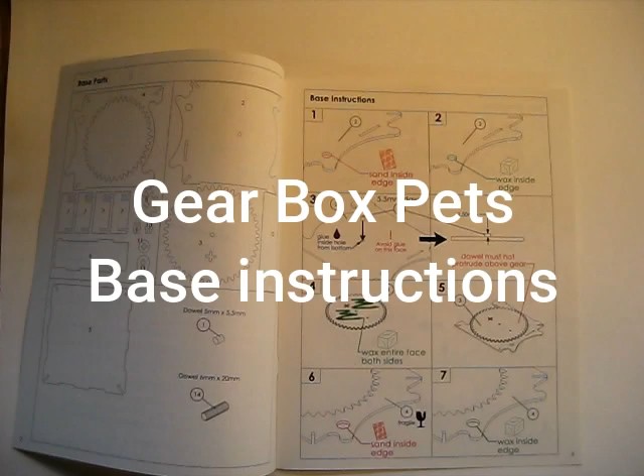These are the base instructions for the Gear Box Pets.

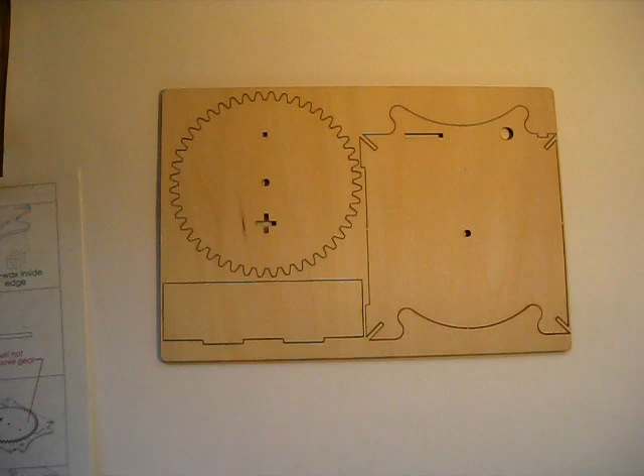Step 1, we're going to take part number 2 and sand the inside edge. You might like to use a scalpel like this just to help cut these tabs.

Just sand off those tabs, sand or cut, so they don't get in the way. Here's the sandpaper provided.

Now we're going to sand inside of this hole where our winding shaft will be. Just roll the sandpaper into a bit of a tube. Just give it a light sand.

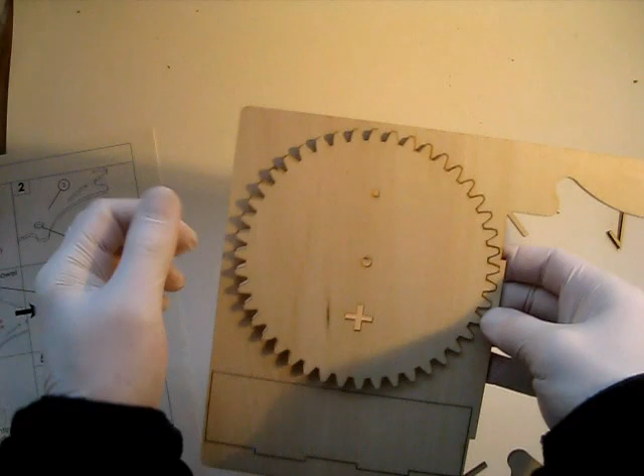Now we're going to take our gear number 3 and wax the faces both sides. Again, make sure the tabs are sanded off. Don't want tabs on the gear teeth because they can bind the mechanism.

Again, apply a lot of wax. Just rub it all over the face. Then flip it over and wax the other side. Give those teeth a bit of a wax too. So the wax acts as a lubricant, like oil, helps to reduce friction in the mechanisms.

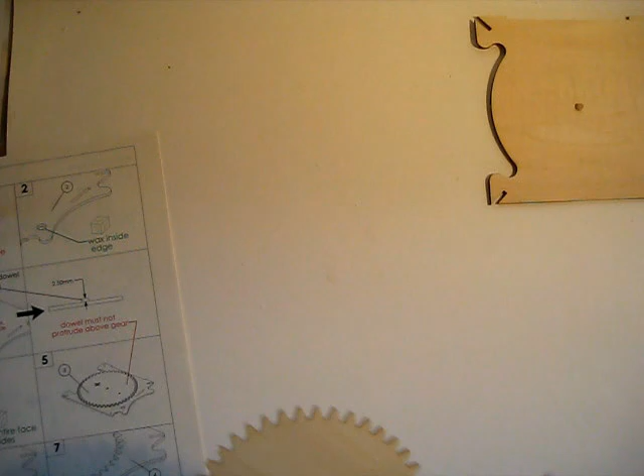Now we're going to place our gear.

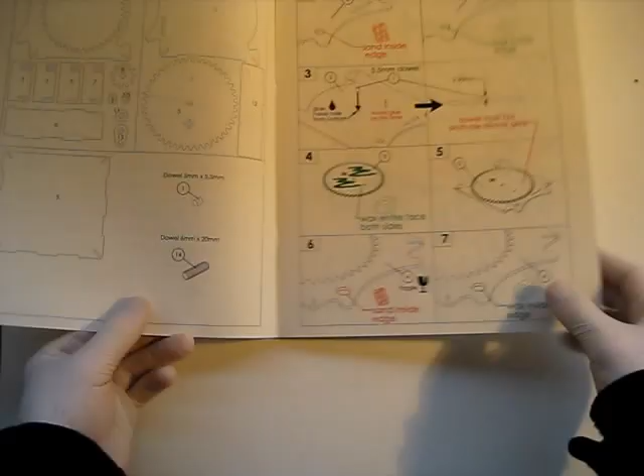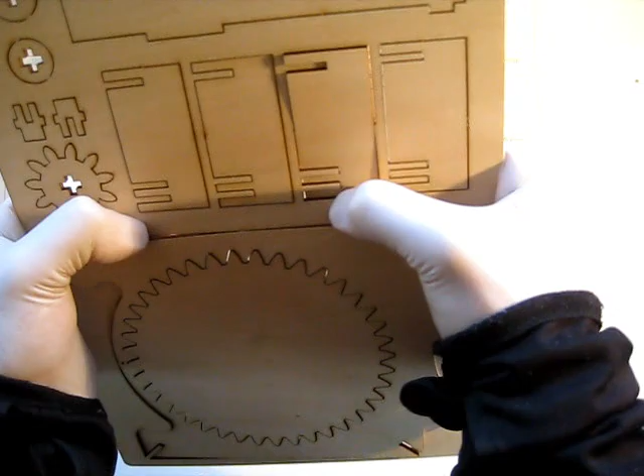Step 6, going to take part number 4. You might not need a scalpel to press out the parts, but if you do, then it can be helpful just to cut the tabs, and you can avoid any breakage. This is a bit of a delicate part here, so I might use the scalpel to avoid breaking it.

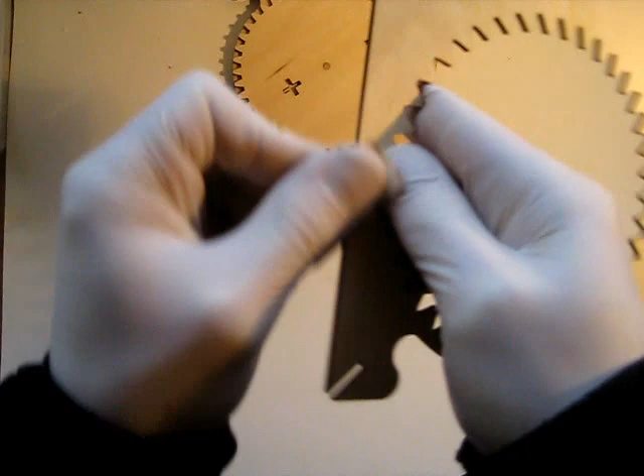And again, sand off any tabs, any areas that you think might catch on moving parts.

Right, so we're going to sand inside of this hole. Doesn't need too much. And we're going to wax inside that hole as well. This is again so our winding stick can move nice and freely.

And you're going to place this on top lightly for now. Make sure that this dowel isn't sticking up past this gear, that it's just below the surface. That way it won't collide with our other smaller gear later on.

Now take these parts, you'll need 4 of them, and as usual sand off any tabs. These are going to push on with the 2 slots.

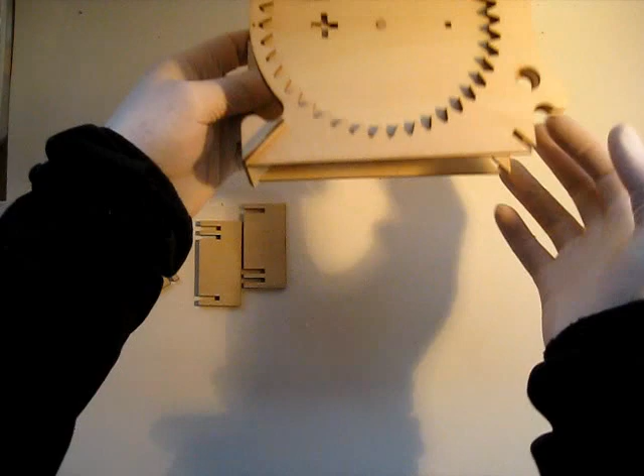And now align this base so that the unnotched side is towards you, and slide that on like so, and slide on the rest. Make sure they're all the way in.

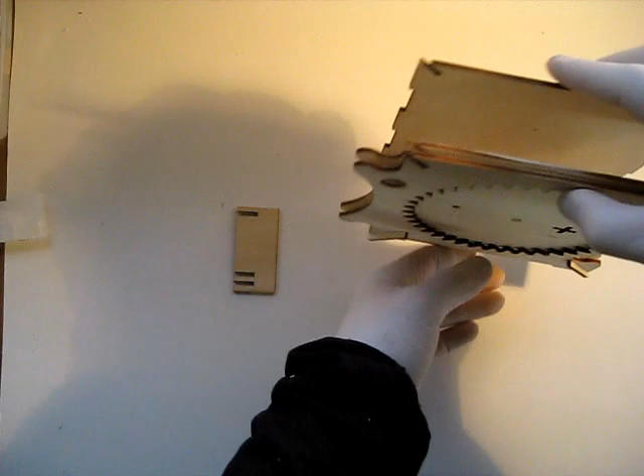And check that gear is moving freely. Okay, now we can take them off and glue them. Now we know we've got them all in the right spot with that unnotched edge on this side.

So you can just place your glue in that slot.

Now I have, and you should have, a jar of water with some brushes in it here. I like to use a larger brush and a smaller brush, and I use that to spread my glue. Just helps to get a bit more coverage.

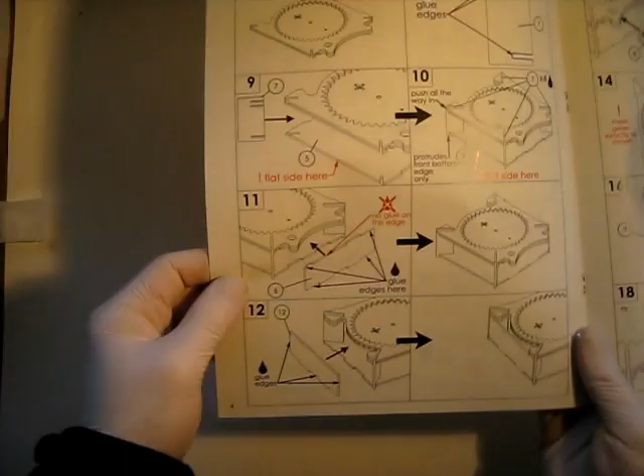Okay, step 11, we're going to find part number 6, glue the edges, no glue on the top edge, and that's going to slide into its location there on the side with the hole.

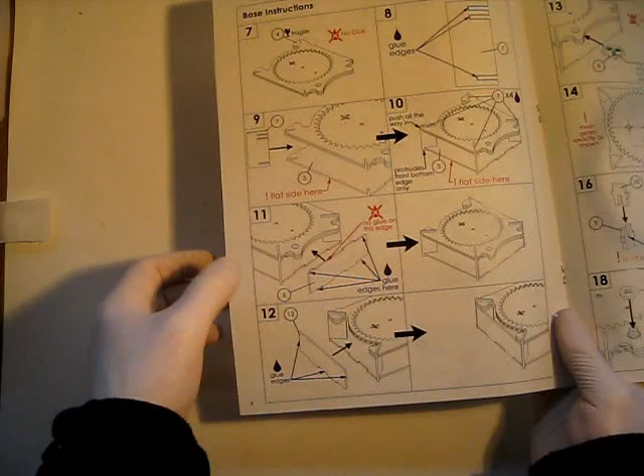Sand off any tabs as usual. So this will be glued into this position here.

Spread that glue out a bit. And you can push in this top tab first. And the bottom.

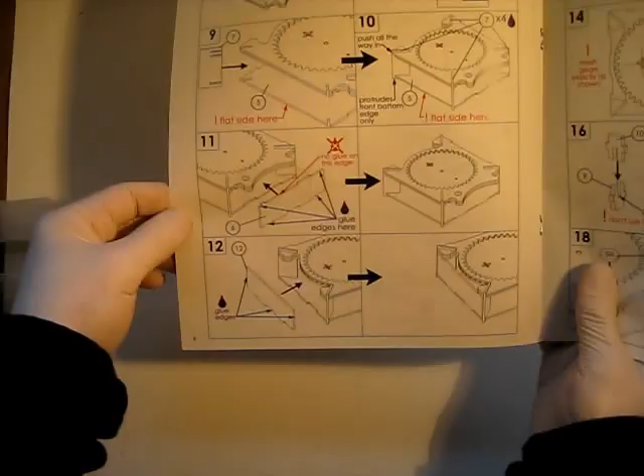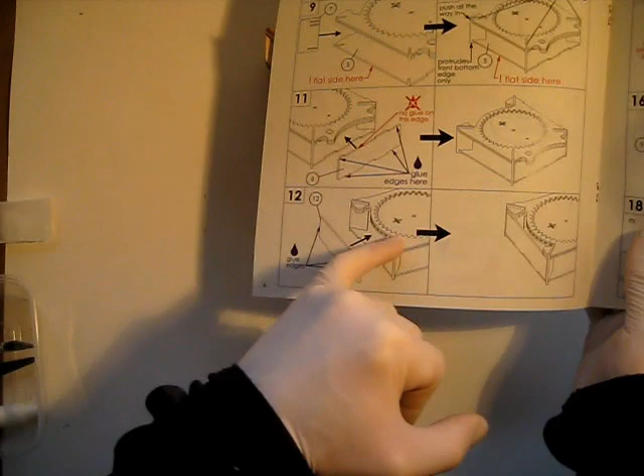So step 12, we're now going to put in piece 12 on the other side, the side with a little female puzzle piece notch. Sand off any tabs.

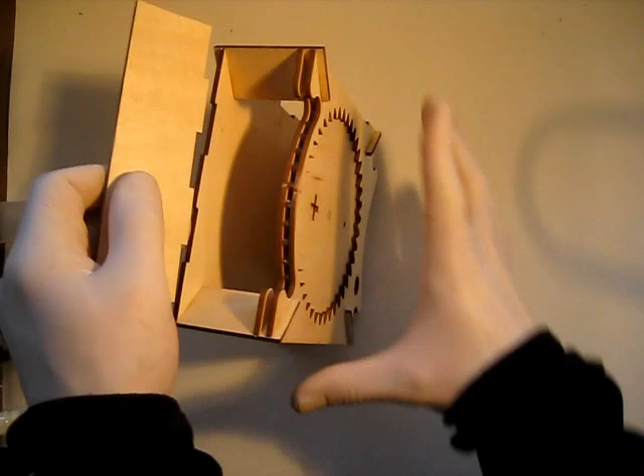So let's put some glue on that.

Spread that glue about. Put the glue here on the edge and a little bit on the face, just on those side parts, on those side edges. Tiny bit on the top, just on the ends. That's the inside face you want that glue, because it's going against these corner pieces.

And we'll use our wet brush to spread that glue about, let it wick into the cracks.

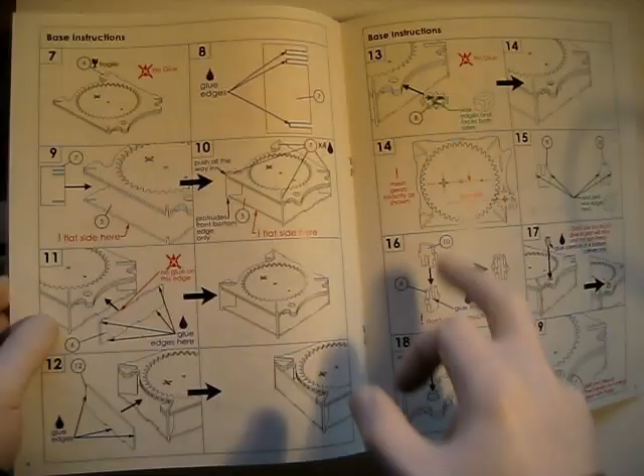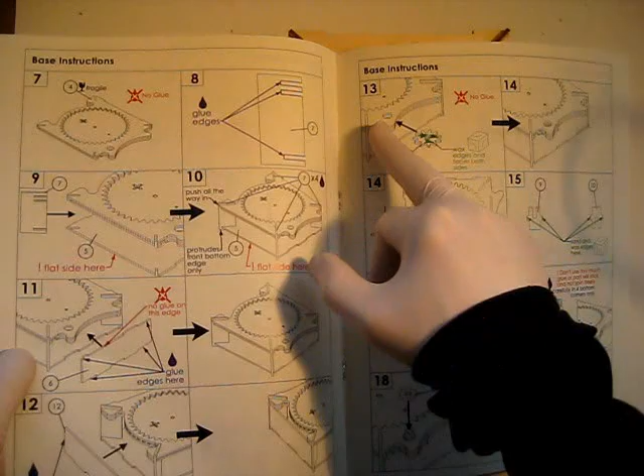Now we want to find the small gear, part number 8. We're not going to glue this piece, we're going to wax edges and faces both sides, and then we're going to slide it in to where the hole is.

It's especially important to make sure there's no tabs on gears, because then the gears will bind when they're moving. So, sand off the tabs, and now we're going to wax both sides.

One side, wax the other side, and wax the teeth.

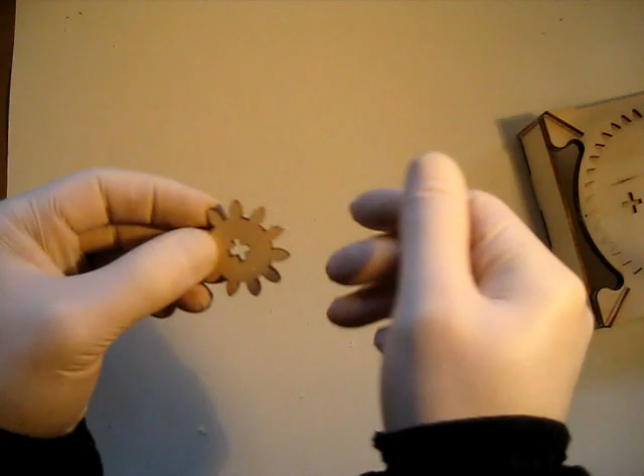And you can just blow away any excess wax. When we slide this gear in, we want to mesh it as shown in this picture here.

So we've got our cross to the left, lined up towards this dot, and then this gear is also making a cross, and we want to find where the cross matches some teeth. So this one, it's not quite lining up with the tooth, but this one, it is lining up with the tooth on the top. And then coming down, there's a gap. So this is our correct orientation.

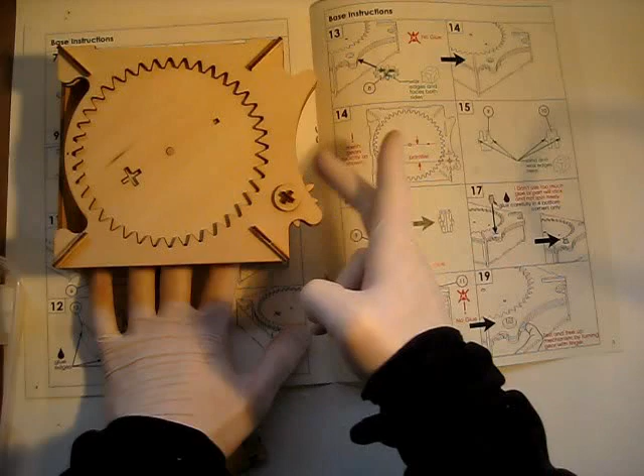And press that on. And now test and free up the mechanism by turning the gear with your finger. So don't hold on the top, hold down the bottom and give this a turn and check that it's nice and free.

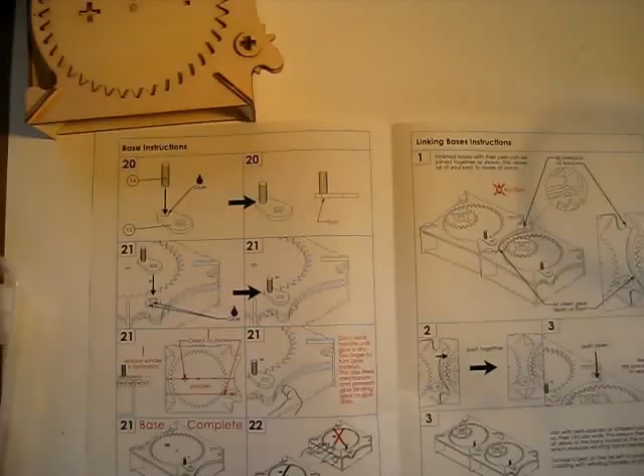And we'll finish with it back where we started, with the cross pointing towards this dot. Okay, so let's take part 13 and 14, which is the ribbed dowel.

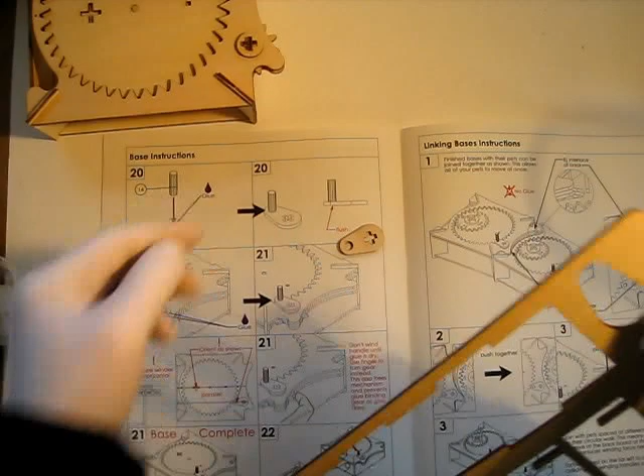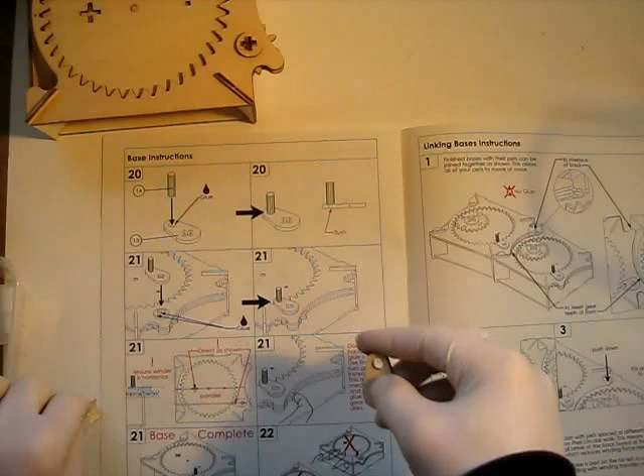Sand any tabs. Sand the flat edge of this dowel a bit so there's no splinters.

And we're going to glue that in here. So let's get some glue.

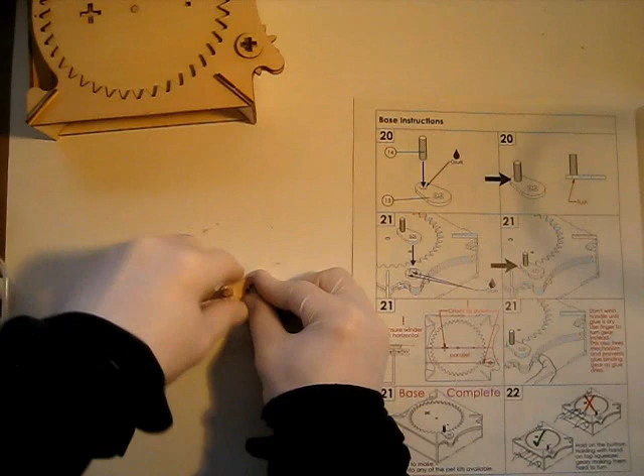Push it down till it's flush on the bottom. Make sure it looks nice and square. Wipe off any excess glue.

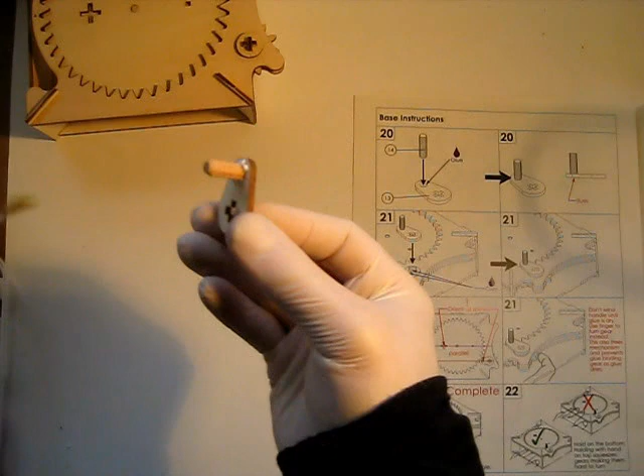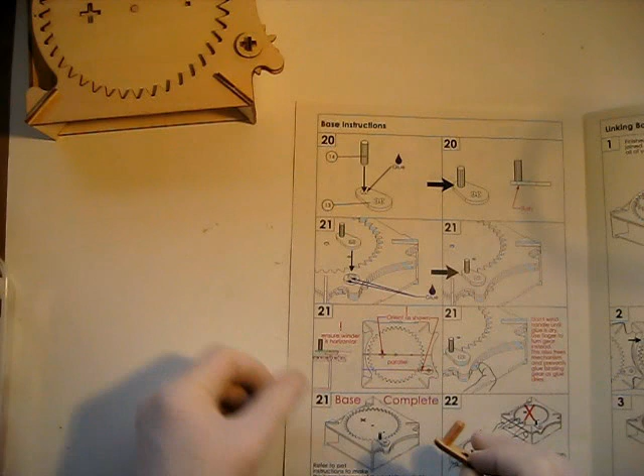So, checking that it's flush. And now we're going to insert that onto our drive shaft and put some glue on these top faces.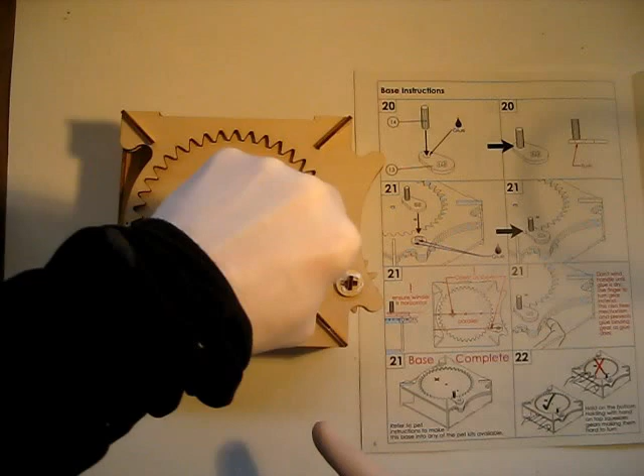Spread that about, and can also go up the edges, up the sides of the drive shaft a bit. Want that to be a nice strong bond.

And we're gluing it so that it's pointing in to the left. So orient as shown with the cross to the left towards this dot and a parallel line running from that dot through the center to this little square hole here. And this is also going to run parallel to that imaginary line, so it's pointing inwards to your left.

And push down on that, make sure it's making a good connection.

Okay, so don't wind the handle until the glue's dry. You can use your finger to turn the gear instead. And if you do that now, it makes sure that there's no glue inside here that's going to bind up while it's drying.

Okay, so that's complete. That's our base, and now this base connects to the different gearbox pet kits that are available in this series. So find your appropriate video for the gearbox pet that you are doing, and we'll see you back here.